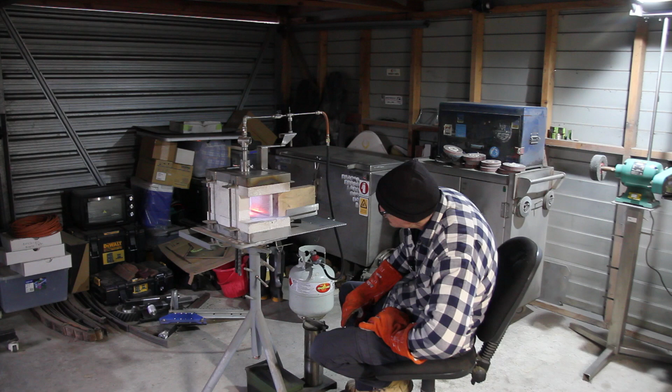I had a bit of a question about my Frosty T burner. As you've probably read the title and know what it's going to be about, I'll go over my Frosty T burner, how it works, and the old forge that I put it in. So without too much more jibber-jabbering, let's get into it.

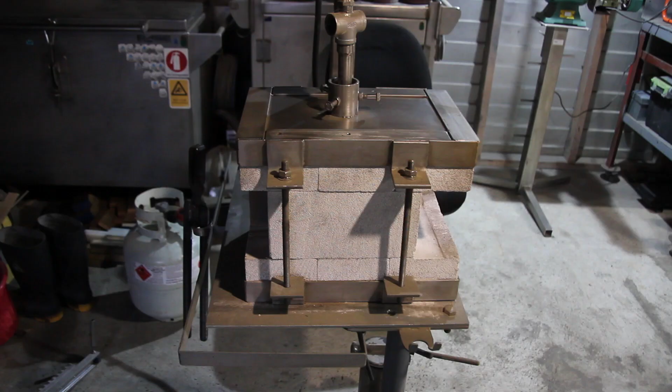A little correction on what I was just saying. Have I tempered in this? Yes, I have. Is it ideal for tempering? No, not really. Usually what I'll use is a benchtop oven. I harden things in here and I anneal them generally. If I'm making a knife, I'll stick it in there, close up the doors, you'll see in a minute, and let it cool down and so forth.

So you'll just take a look at the side of it and what I've done here. I've used soft fire bricks - I've got 1, 2, 3 on the bottom, 3 on the top, and 1 on each side. Dimensions of those are around 115 odd millimeters by 230 that way. Soft fire bricks, they work pretty good.

They hold the temperature in there. And for the top, what I've done, I've made up a stainless steel frame. Bit boogie in a way, but generally I'll just use whatever I had at hand. So it's 50 by 50, I think, by 3 - no, a lie, it's 40 by 40 by something.

So I made up a frame and put a top on here, which you can see is stainless steel. This is a Frosty T burner, as you probably know, that I've made up. And this piece of pipe with 3 bolts and nuts to adjust it just to get it in the center. The top brick, I've drilled a hole right through it. I'm not going to take it to bits. Then I've got the frame bottom and top, and this all-thread or threaded rod, whatever you call it depending what industry you're in.

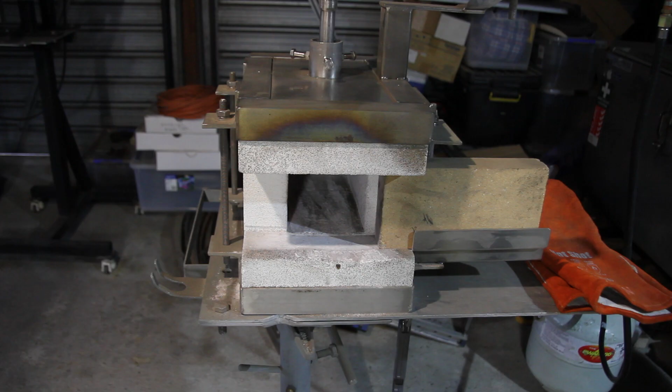And it's just sitting on an old site table that I had, again just using what I've got to get through what I need to do. So that's what it's made up of - 1, 2, 3, 6, 7, probably 8 bricks there. So naturally you can see we're looking at the front now, and you can see the frame there.

What I've got over here, if we take that one out, I've just made up a slider for that front door brick, whatever you want to call it. Again just used whatever I had, a bit of box and something underneath it. On the front I've used the hard fire bricks. Yeah, just slides across there and closes it off if I need to do that.

If I did it again, I probably would put a hard fire brick in there, because this soft stuff does wear quite quickly. But it's no worries, I've got some other bits over there to add in if I need to, but that's just one point to keep in mind - they do wear. Hard fire brick I'd probably put in the bottom, like I said, but never mind, that's how it is.

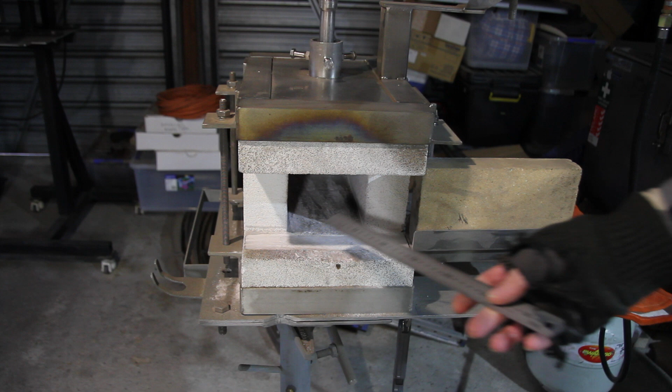So my actual opening, my little box in there, if I can see that ruler, it's about 220 millimeters by just over 100. So that's what I've got there.

Fly vice jaws are really quite small, so I didn't need much, and that's how I started, and that's why I made it in the first place. But I can fit about 12 inches of steel in there to make a knife. That's about the excess of it. And it's got a back door on it as well, which I'll show you in a second. So pretty simple construction there really, and yeah, pretty much what it is.

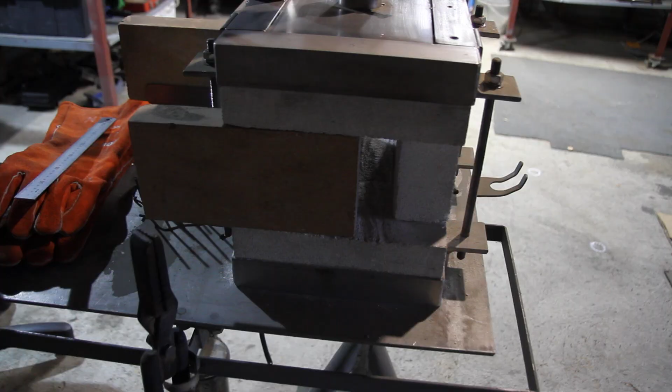So she's a bit dark and dingy in the old workshop at the minute, but hopefully you can see the back of it there. This brick here slides as well, so longer blades I can poke through and still heat treat them and stuff like this.

There's no slider on this because this was an afterthought. Originally I had it clamped in, so that was stuck there. I found the forge burns and works a little bit better, quite often, if I can open it up and get a little bit more air into the chamber. I don't really know the science behind it, but that's just what I've found works.

If you look down there, you can probably see how she's wearing out, but I've been using this for over a year, probably 2 years now, making about one knife a week, with fly vice jaws in there as well, so it's lasting pretty good.

I do realise I'll have to change those bricks out at some stage, but for the minute, yeah, they work pretty good. I might have mentioned, there is a bit of moisture in here which can absorb into the bricks, so you've just got to be a bit wary of that when you fire it up, because it can cause cracking, I guess, and stuff like that.

So yeah, that's about the forge in a nutshell, really. So now we'll have a look at the rest of it.

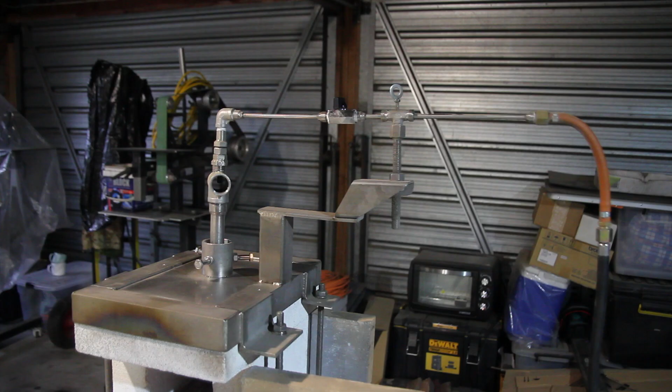So moving on, a look at the top. This here, if you're familiar, you probably are - you probably wouldn't be watching this anyway. This is what they call a frosty burner, designed by somebody called Frosty, I think. But anyway, you'll note that it's slightly different to other ones you see online, because again, I just scavenged up whatever bits and pieces that I had.

We'll take a close-up look at what I've got in a minute, but yeah, I've used stainless pipe and stainless fittings. So I'm just coming up onto here, and that's actually a bolt, which I'll show you in close-up as well. I'll just come onto here.

There's a 6mm stainless tube. In here I've got a ball valve just for turning it off and on, and this really here is just to hold it on this boogie old clamp frame thing I've got here. This isn't actually what it looks like, it's just holding that tube. And then we're running over here into the regulator and the gas stuff.

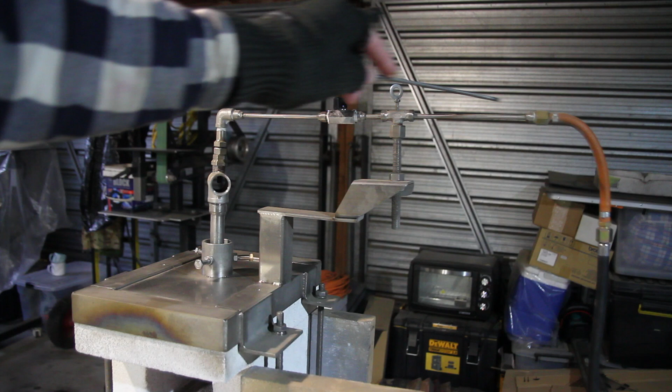If you're making one, you just need to be aware that your gas fittings are slightly different threads to other threads, so they're a little bit different. But that's all good, so not much to that.

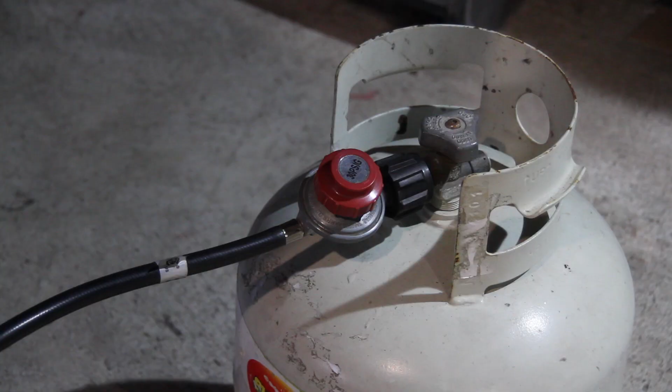We're going to have a close-up in a second, but before we do, one important thing to note if you're new to doing this sort of burner thing, is that you will need a different gauge than a normal barbecue one. I did try a normal barbecue regulator - it didn't really work too well. This one here is a 30 PSI gas regulator that I bought online, and if I can find the link I'll put it down below, but I probably can't because I bought that like 3 years ago. Had it sitting here, so no real idea where I got it. But one thing you will need is this adjustment here, which you don't have on your normal barbecue one. So it'll go up to 30 PSI.

When I fire it up and normally open the bottle, I'll get this cranked down a little bit, so I don't really know what PSI I'm running it on. I'll open it up, fire it up, and then slowly crank this up to where I want it to be. At the minute, you might notice when we fire it up that it's messing around a little bit and fluttering, because I'm nearly out of gas - I probably am out of gas, but never mind. So I'll open it up and I'll crank it up. When I've got a full gas bottle, I can normally get it full noise, but yeah, it's just tweaking around. But that's one thing to note - you will need a 30 PSI or similar regulator to actually run them.

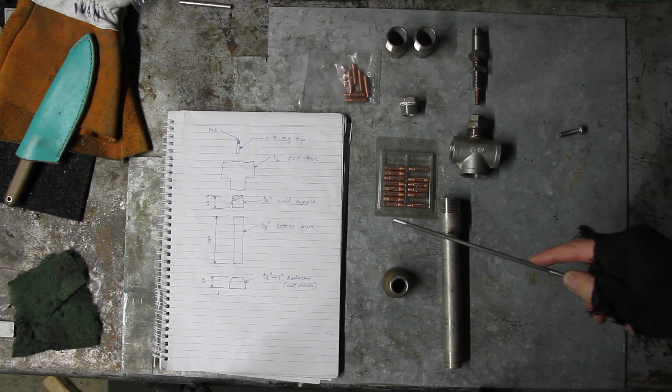So if you can see this in the camera looking down here, these are the little drawings made up for the nozzle that the gas runs through. You might note this is a little bit different to your standard design that you'll get online, although very similar. I've just used what I had.

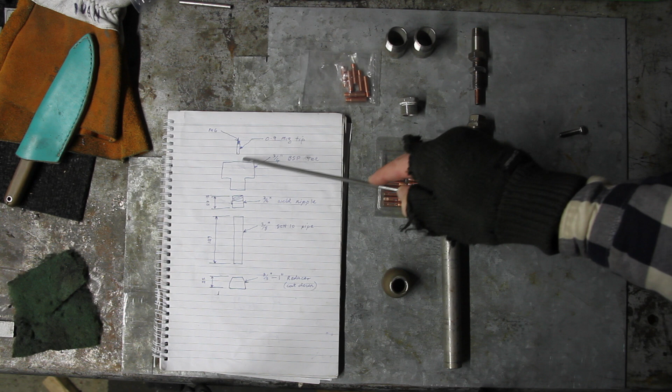Up here is a nozzle I put in, so what I've used there are 0.9 MIG tips. I've got a variety there. These ones I bought off AliExpress, got a whole box, I think 20 in there for the price. I could get them down here in Kiwiland for 5 each, so that wasn't too bad.

Would I use them for MIG welding structural steel? Probably not, but yeah, they'd work all right. Never mind, that's another story. So that's your MIG tip, 0.9, if you're wondering. If you're thinking about making them and wondering what the thread is on the MIG tip, it's just M6.

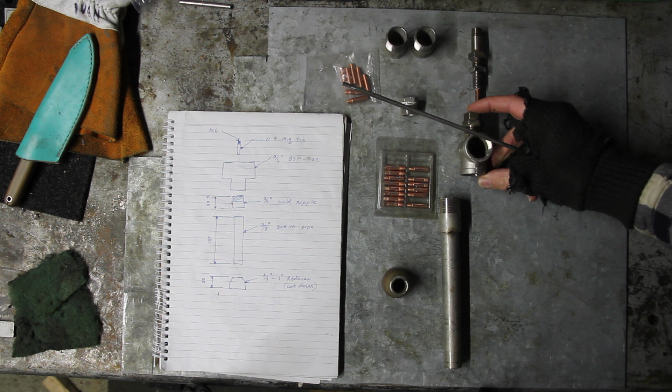From there, what I've done is drilled out this bolt right through and put a fitting on the top. I've got a nut on here because what you need to do is, inside your T here, I'll tip it up, you need to get that MIG nozzle centred in here.

So it needs to be in the centre of this T for best results. When I was tweaking it and getting it right, I made that bolt thread in here an M12, so I have adjustment, so I could get that height where I needed it and where I wanted it.

To get that, I've taken one of these, that being a 3/4 inch, whatever it is. You'll note down here we use metric measurements, but these are pipe fittings, so they generally come in imperial. So I've taken one of those and welded it onto the top of here.

You need to get it all centred in here, you need to get it all central. This one here I'm going to have to cut off and redo because it's slightly not right. So that's why this prototype type thing is here.

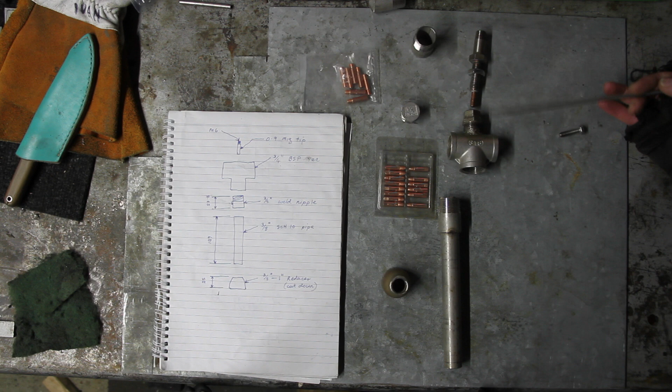Yeah, so that goes into the air and your gas comes through. On the bottom here, you can buy standard pipe fittings. You can get a certain length which will have a thread on the end of it, and that's what people normally use, by doing a bit of looking online.

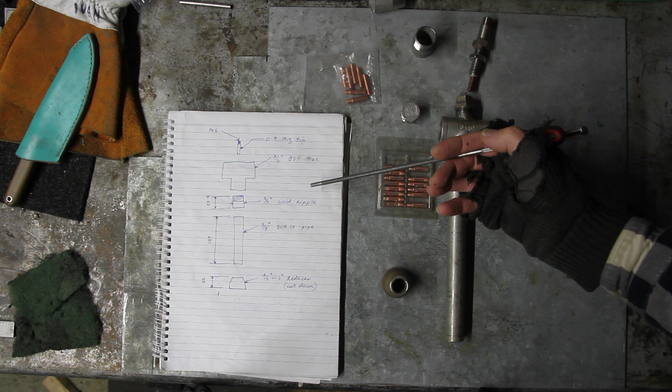But for what I had, these fittings here are 3/4 weld nipples, and that's what I used to fit into that. That there is a 3/4 BSPT. I could have used 3/4 pipe, but I didn't have any.

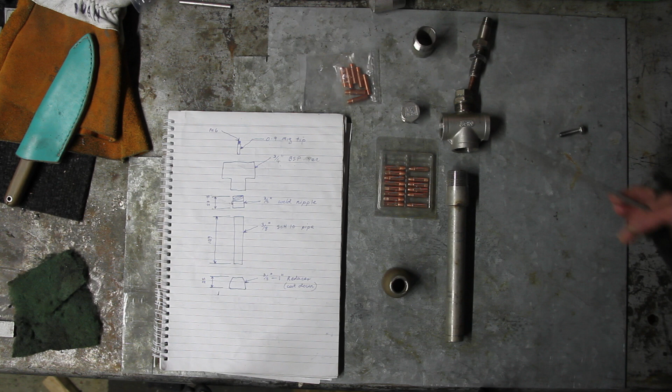So what I've used is 3/8 Schedule 10 pipe, which means if you're looking down here, you can see my measurement. I might do a close-up on that, but what I had to do is get a length of pipe, you can see I've got marks on there you might not be able to see. I stuck it in, tried it at a certain length, then cut it off and brought it back to where it worked best.

It was a bit fiddly to set up, a bit temperamental to be fair, but once I got it, it was pretty good. So that came down onto there. One thing I'll also note is when you put it in the vise like that and fire it up, it works fine. Put it in the forge and it didn't work very well at all.

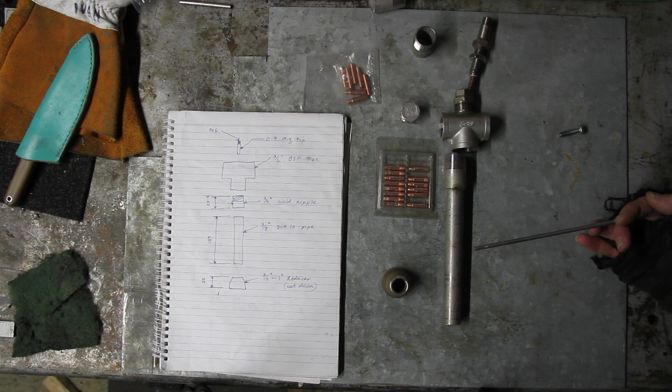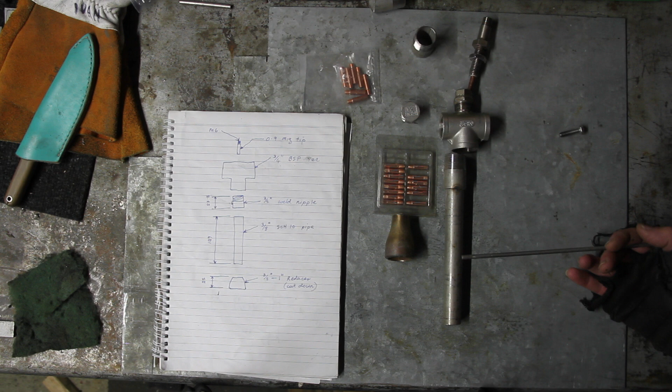So what it needs, and most of them will have, is a reducer on the end of some type. You can see here I've got a Schedule 40, which will be a 3/4 to 1 inch reducer, and what I tend to do in the other machine is, you might note there I've got 25mm, I'll cut this down to 25mm and put it on the bottom. I tried bigger ones, smaller ones, and without it, and found this one worked best for me.

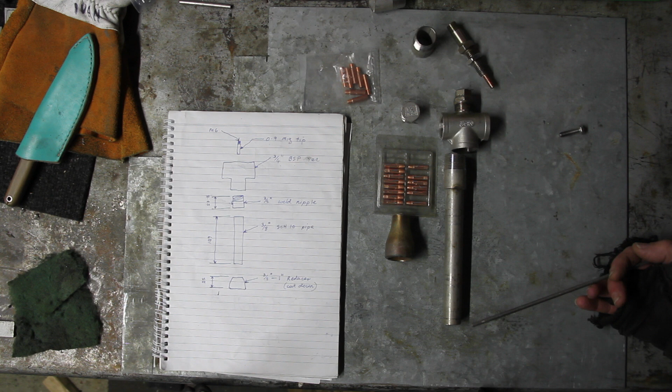So that's what I've done. Adjustment in there, get it all central, get that tip in the middle, and it tends to work all right. Your lengths here you may have to tweak around, so that'll be welded on as we go. Yeah, so that's the basics of my Frosty T burner thing.

For the purpose of the video, I've just stuck this little one together to give you a rundown on how I set it up. It's only how I set it up. What I'd recommend is you check these fittings with soapy water before you get too carried away, especially when you put it on your machine. Just make sure nothing's leaking.

Which begs the question, if you've had much experience with oxyacetylene plants, you have flashback arresters and one-way valves and all the rest of it. Do you need that on this, or does the regulator do it? You can tell me in the comments because I don't really know. I researched it online and couldn't find anything. Anyway, I haven't got one, so that's that.

We'll move forward. So you've got your MIG tip in the center. I tried it with just a pipe and it didn't run too well, so I've just tacked it up again for the purpose of the video. I set it up in there like that, got my lengths right, and fired it up. So we'll fire it up and see if she goes, and you'll get an idea of what I did. Let's go.

So you can see there, just started it. Like I say, I'm probably running out of gas. It's running not too bad, and you can crank it up. When they're going properly, they should be roaring. You can see a bit of red in that flame, so I don't know if it's neutral, but slowly crank it up.

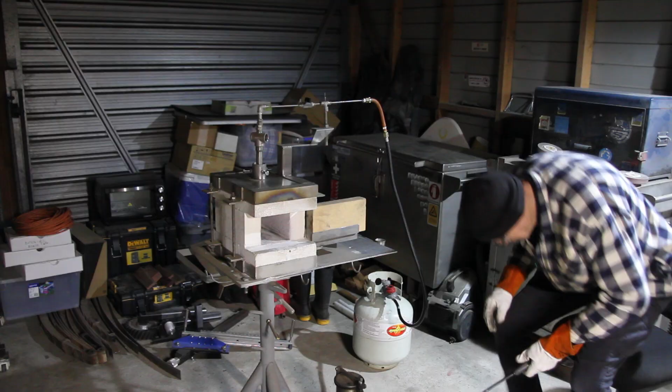So we'll go back over to our forge and we'll run it in there, and just show you how she works.

On these parts here, you'll see I've used heat resistant thread seal tape, things like that. Again, you just want to check and make sure you've got no leaks. You want to be careful with that sort of stuff, I guess.

So what do we do? Turn on the bottle and away we go. Yeah, let's have a look.

Like I also said, and might not have said, I did find in my experience it's gone out, I turned it off too far. Anyway, just by the way, I did find a little bit more tweaking needed from the vice to here, because it does run differently in the forge, in my experience, than it did in the vice. So a little bit of mucking around to get them right, but once they're right, they tend to run pretty well.

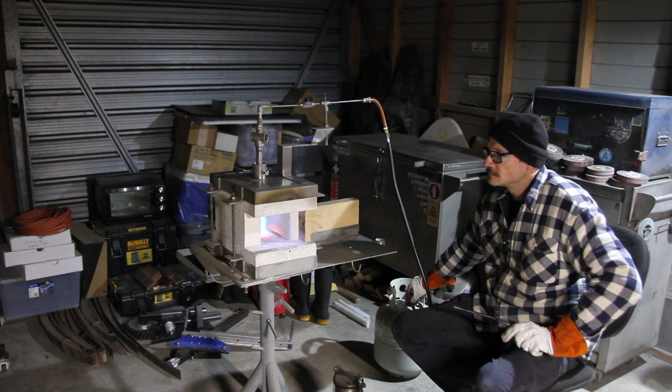So that's with the pressure just on, down. That's for a noise.

So yeah, that's about that in a nutshell. Will it get hot enough to forge weld? Don't know, never tried it, but it definitely gets the steel hot enough to harden and temper — not temper again, I said the wrong thing — to harden it and anneal it and do what I have to do.

If you want to have a look at me using it, just flick back through some of my other videos. Yeah, that's about that. So we'll do a little outro, call it a day, and hope you've enjoyed it so far. So there's my forge and my dirty old Frosty T burner, and any other questions you've got, just flick them in the comments and I'll try to get back to you as soon as I can.

Once again, just bear in mind your safety — if you're not familiar with this sort of thing, then get it checked out. I will cross paths with someone who's an expert on this one day and I'll get them to check it out. I'm not an expert on it. I just did what I had to do and got it going as good as I can. Does it work? Yes, it works really, really well. I'm very happy with it. Simple sort of construction, just chucked together whatever I had lying around and got it working.